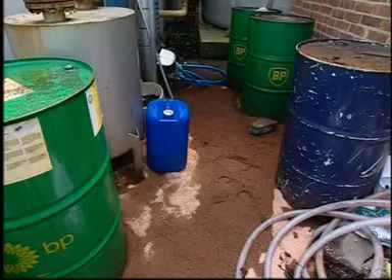Liquids, if not handled or stored correctly, can become a pollutant. Spills of oil, chemicals, solvents, or even foodstuffs can have a direct impact on the environment. Spills can be caused through accidents, leaks, poor maintenance, bad working practice, bad handling, and inappropriate storage.

If liquid spills of any kind are not handled or disposed of in the right way, they have the potential to cause severe damage to the environment and our water resources. Even a small spill has the potential to turn into a major disaster. Consider this. 1 gallon of oil can cover an area of water equivalent to the size of 2 football pitches.

1 pint of oil will pollute 100,000 gallons of drinking water, and 1 litre of solvent is enough to contaminate 100 million litres of drinking water, or the equivalent of 50 Olympic-sized swimming pools. Hard to believe, but 1 litre of milk is enough to remove the entire oxygen content of 10 tons of river water. And how about this?

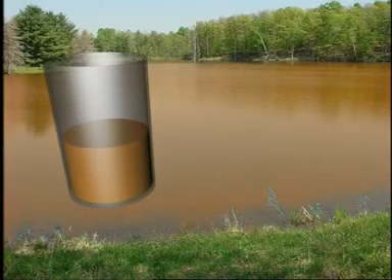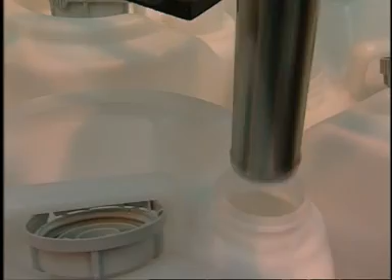Fruit juice, alcohol, yogurt, and any other organic drink or foodstuff entering water can be up to 1,000 times more destructive than raw sewage. Even in small amounts, these liquids can wipe out whole river populations through oxygen starvation. All of us who work in a process where liquids are stored and used have the extra responsibility to ensure that those liquids are controlled and do not contaminate our environment in any way.

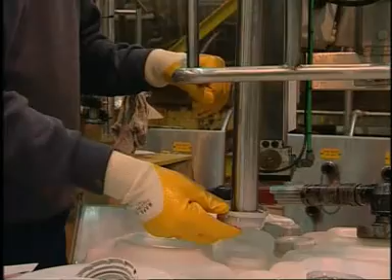The points we need to remember are that spills can cause serious harm to the environment, put employees' health and safety at risk through inhalation of fumes, contamination, slips and falls, and all these could lead to expensive clean-up costs and compensation claims, as well as loss of high-value materials and consequently profits. And if you're found to have broken the law, then you may face large fines or even imprisonment.

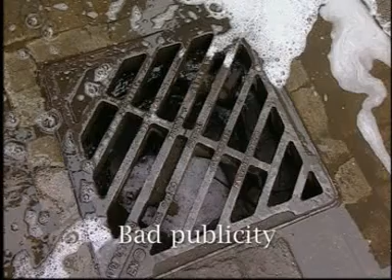Add to this bad publicity, and your reputation could receive irreparable damage, which could have a serious effect on your company. Health and safety is the most important reason for spill control. Injuries caused through spills have resulted in very expensive claims against companies. Companies who violate best practice can find that they're refused insurance or their premiums are substantially hiked.

Among the laws and regulations governing spills and their disposal are the Water Resources Act 1991, the Environmental Protection Duty of Care Regulations 1991, Protection of Groundwater Regulations 1998, Control of Pollution (Oil Storage) Regulations 2001, and the Dangerous Substances and Explosive Atmospheres Regulation 2002.

Working to ISO 14000 environmental audit standards and operating best practice principles should ensure that you improve your day-to-day operations and keep you in compliance of the law. The Environment Agency publishes a series of pollution prevention guidelines laying out best practice in a series of specific applications and a range of industries.

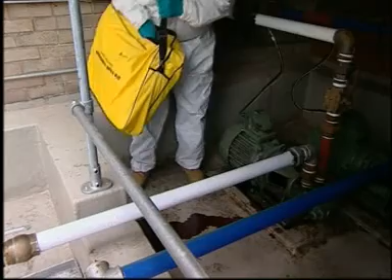In the event of a spill or leak, your risk assessment should have measures in place to deal with it in a safe and controlled manner. There's no corporate defense for pollution incidents. The people responsible are personally liable for prosecution.

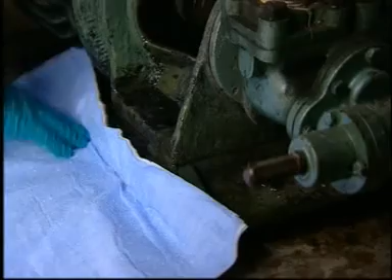To keep within the law, you need to consider several factors: site drainage, spill prevention, spill control and equipment, emergency spill response, including the reporting of incidents. Now, let's look at each of them in more detail.

There are two types of drains from most sites: surface water drainage that discharges to controlled waters or to an interceptor, and foul water drainage that leads to an effluent treatment plant on site, or more usually direct to the sewer. Each drain is coloured differently. Surface water drains should be coloured blue and foul water drains red.

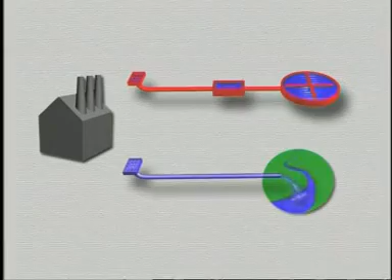Your company should have an up-to-date site drainage plan. Drains, particularly in older plants, get wrongly connected. If in doubt, ensure you get a site drain survey to ensure that your drains are functioning correctly. Surface water drains should be coloured blue.

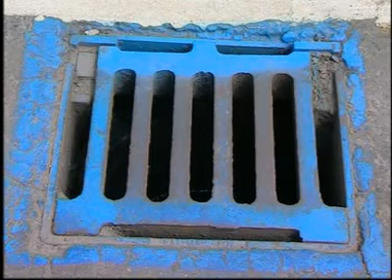Storm or rainwater is the main liquid that will flow into these drains, which flow either direct to controlled waters or, with some companies, via an interceptor to controlled waters. Interceptors are used to trap traces of oil before discharge. Interceptors should be regularly checked and emptied. Companies must have consent from the Environment Agency to discharge anything apart from clean water to controlled waters.

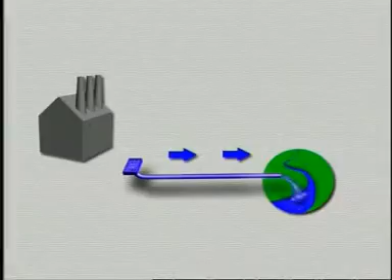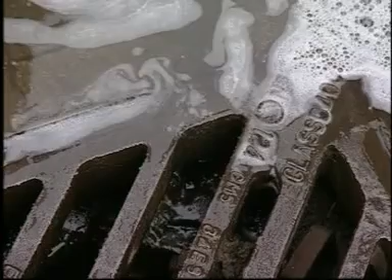When cleaning machinery or a vehicle and the drainage is into a surface water drain, you may be creating a pollution problem by using detergents or washing away oil-based liquids. You'll therefore need to move the operation to an area that has drainage for foul water or provide a suitable drain for that work area.

Drain covers should be located near to vulnerable drains and deployed where there's a risk of spillage or when a spillage happens. You may wish to consider placing barriers or defense channels between any liquid storage areas and surface water drains.

You also need to be aware that liquid spills may be able to permeate into the ground and contaminate groundwater, which could also drain into controlled waters. In this case, it's important that a suitable non-permeable surface is present where you handle or store liquids.

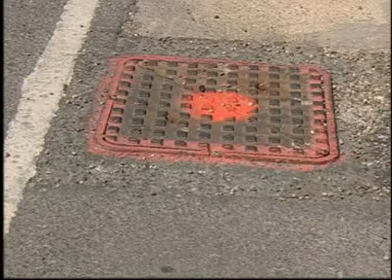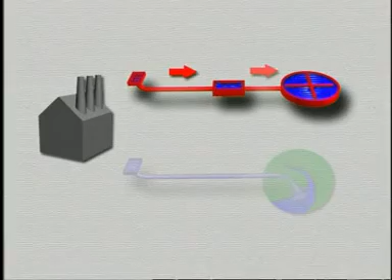Foul water drains lead to an on-site effluent treatment plant, or more usually, direct to the public sewer. The drains should be coloured red. You have a duty to ensure that your foul water drains are in good condition and kept unblocked. You need consent from your sewer undertaker to discharge foul water to the sewer.

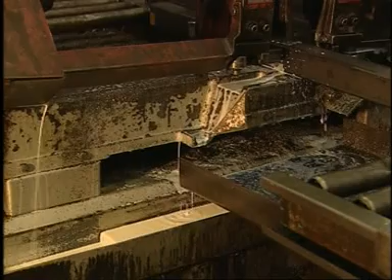The risk assessment of your operations should help you identify areas that may be vulnerable to leaks or spills. These areas can be bulk liquid storage, drum storage, smaller container storage, liquids in the production process, and liquids used for services. Reducing risk or preventing spills is a requirement of health and safety law and needs planning and careful consideration for your particular type of operation.

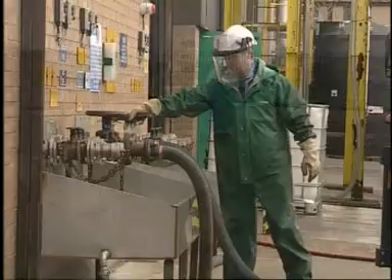Most spills or leaks come about when liquids are being transferred from one place to another. Liquid in pipes has the potential to leak at joints and valves, and liquid in drums and containers can leak through damage or bad handling.

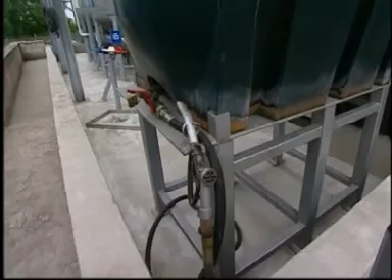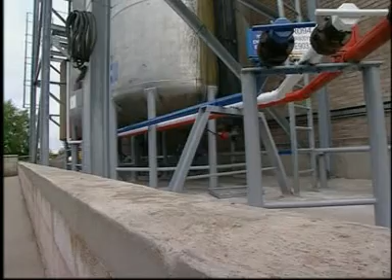Let's take a look at bulk storage and how we can prevent leaks. Bulk tanks should sit in a bund, which is effectively a secondary holding area to capture any leaks from the tank itself or spills during loading and discharge. You have to consider the condition and effectiveness of the tank and also the state of repair of the bund. The walls can become damaged and the seal or lining can deteriorate, increasing the risk of leakage.

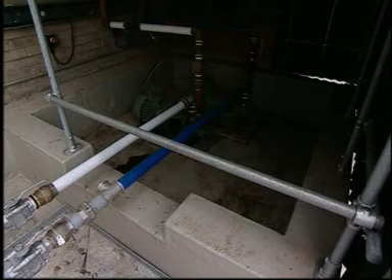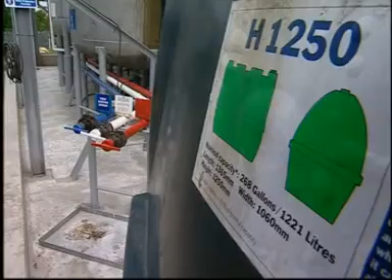All bunds should be impermeable to oil and water. Bunds need to be inspected regularly and, if necessary, repaired or relined by a specialist company. All bulk tanks must be labelled correctly with the volume of the tank and the contents within. And if they have any pipes or valves outside of the bund, then the seal should be checked regularly for leaks and a drip tray should be placed underneath this area as a precaution.

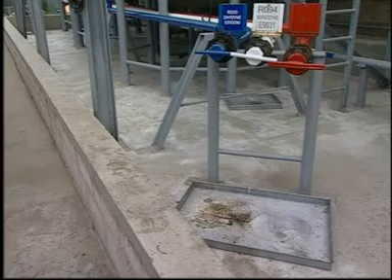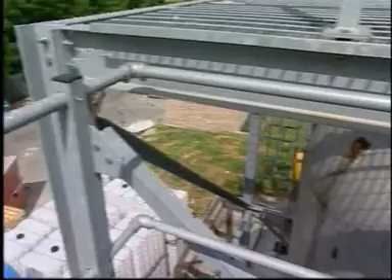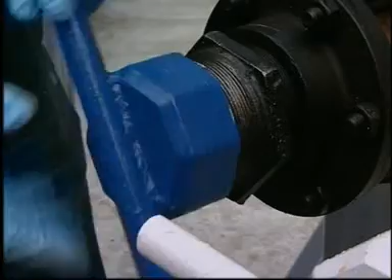Overfilling of bulk tanks and leaking taps and valves are the most frequent cause of liquid spills. Always ensure there is room in the tank before filling, and the delivery of bulk liquids is always supervised. Joints, seals, taps and gaskets should be regularly inspected. If there's a drain near a bulk delivery point, then drain covers should always be deployed before delivery commences. Valves should always be padlocked to avoid vandalism.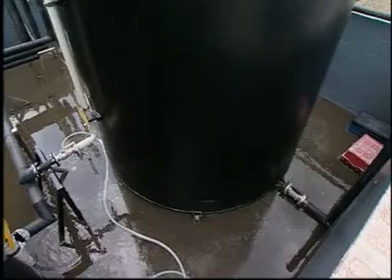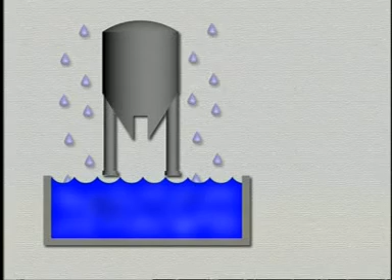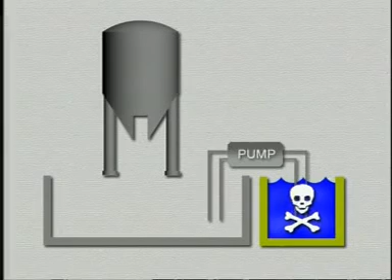External tanks are of course open to the elements, and that means that if bunds are in good condition, then rainwater will collect in the bund. This reduces the holding capacity of the bund. You should therefore have regular inspections of bunds and a system in place for the pumping out of any excessive rainwater. This rainwater may be contaminated by the liquid held in the bulk tank and should be disposed of in the appropriate legal manner.

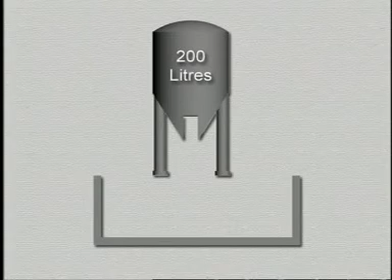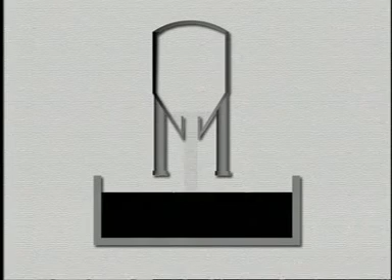External oil storage of 200 litres or greater must have a secondary containment system, a bund, and it must be able to hold 110% of the capacity of the single largest container being stored, or a minimum of 25% of the aggregate capacity for bunds storing multiple containers.

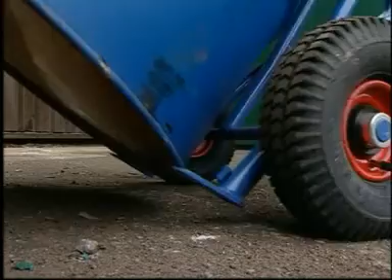Drums containing liquids can also be stored indoors, and you should consider secondary containment such as drum spill pallets. Drums and liquid containers are particularly vulnerable during handling and transfer. Moving them increases the possibility of damage, and the risk of a spill or a leak becomes greater. Drum dollies can be used to transport containers safely. Equipment is available for drum storage that provides secondary containment, and you may wish to consider these for your needs.

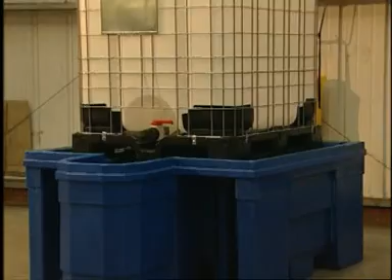Your business may not use drums, but may deal in bulk storage and handling of other liquids. In this case, you may need to store your goods on a pallet that is designed to collect any leakage from damaged goods. Intermediate bulk containers, or IBCs, also require secondary containment. Wherever you store liquids, best practice should be that you have a secondary container to capture any leaks, however they might occur.

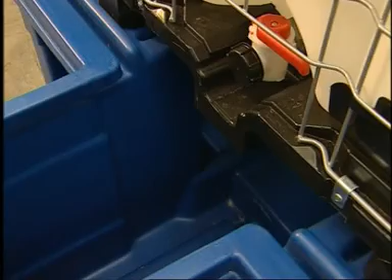We've looked at storage outside and inside buildings using bunds, special pallets and safe handling equipment. But what about when you're storing hazardous material outside? These need to be stored in a separate safe area, and this itself should have inbuilt precautions to prevent spills or leaks escaping into the environment. There are safe units available to cover the storage of most hazardous liquids. Wherever liquids are stored, best practice requires availability of drain covers if close to surface water drains. It also requires spill kits to be in place of the right type and absorbent capacity.

Your risk assessment is your guideline for implementing controls in the eventuality of any spills or leak in the workplace. The controls will, depending on the liquids you use and are assessing, invariably recommend measures, procedures and equipment best suited to tackling the leak or the spill.

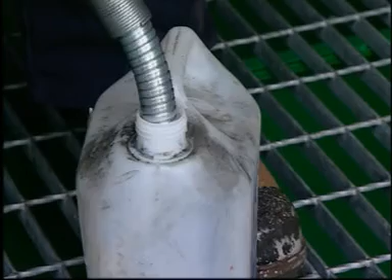In most plants, there's day-to-day cleanup, including housekeeping, and provision for an emergency spill. In a process like this, oils are regularly dispensed from drums as part of the work task, and provision is made to control these types of spills. Older machines can leak, and in many factories and works there are regular spills and leaks that may be partly due to the work process. Easy and on-the-spot provision of effective absorbents allows for efficient operations. Regular cleaning should not be confused with provision for an emergency.

Emergency spill kits of the right type and capacity should be deployed, but only used in an emergency. They should be regularly checked against pilferage. There are many products on the market to help you prevent and control spills and leaks. Absorbent socks and pads are immediate, fast, easy to use and cost-effective.

It's best practice to place absorbent materials or wipes anywhere in the workplace where liquids are used and spills could happen. If you use materials and equipment that become contaminated themselves, remember that they have to be disposed of in a correct and safe manner. You may need special tools and/or personal protective equipment to clean up liquid spills, and these too will need to be cleaned and disposed of in a correct manner. Remember, prevention is probably the best form of control.

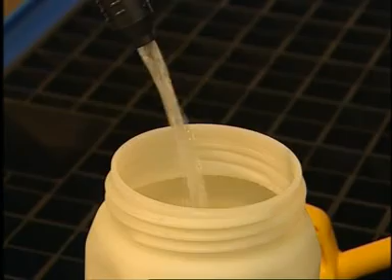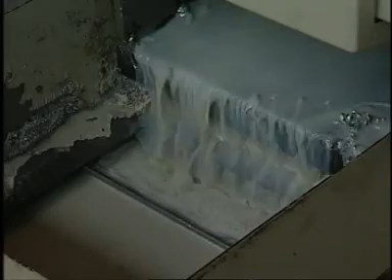Storage and the handling of liquids inside buildings can be approached in much the same way as external storage. You have to consider that it's likely most of your manufacturing processes will take place inside. You'll need to look at these in isolation and decide what is the best way to control any leaks or spills and what measures to put in place in the event of an accident. It may be that a spill kit strategically placed will serve most of the needs for one particular work area. It may mean that you'll need to place absorbents in a suitable place to eliminate risk.

Spill kits are available for 3 specific applications. For maintenance absorbency required inside factories and other premises where oil, water-based cutting fluids and mild chemicals may be used. Then there's outside spills, such as oil and water. This spill kit allows you to absorb the oil and not the water. Chemicals, strong acids and alkalis require absorbents that are designed specifically for them. British standards require that these absorbents are coloured yellow.

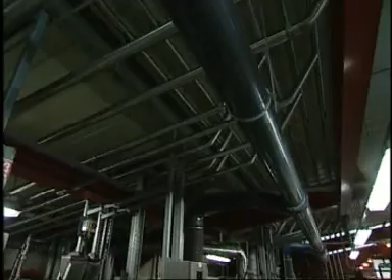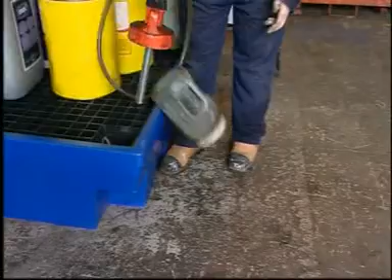The added problems inside a building can come from things like pipes and ancillary equipment. They need to be included in your risk assessment and controls put in place. Whatever the storage or operation, wherever you work, being observant, vigilant and active towards any problems with spills and leaks is important. Good housekeeping may be just the reaction that's needed, and it's something we should all feel responsible for. Don't ignore what you might consider to be a small problem. It may soon become a bigger one than you think.

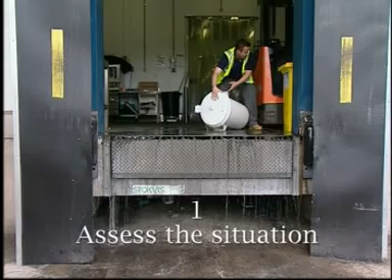Best practice requires you to have an emergency spill plan, detailing contact numbers including those of trained first responders. All first responders should have had training involving both classroom and practical training. You also need a guide of how to deal with the liquid being used. In the event of an accidental spill or leak that has the potential to cause harm either to people or the environment, there are clear steps you should take. Assess the situation. Try to assess what the liquid is, the quantity involved, and if anybody's injured.

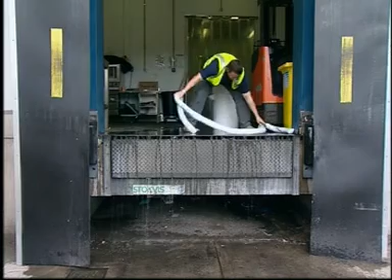Protect yourself and others by wearing personal protective equipment if necessary in accordance with the material safety data associated with the spilled liquid. Contain the spill. This will buy you time and help you reduce the area of contamination and lessen the impact. Stop the spill. Once the spill has been contained, you can stop the source of the spill. Reassess the situation and make sure the spill is fully under control.

Clean up. Using appropriate materials, treat all contaminated material as the liquid spilled. The absorbent takes on the liquid's characteristics and may be needed to be disposed of as special waste. Decontaminate. Ensure all personnel, personal protective clothing and equipment is decontaminated and/or disposed of correctly. Report. Learn from your experience, inform and report to everybody involved in the spill and change procedures if necessary.

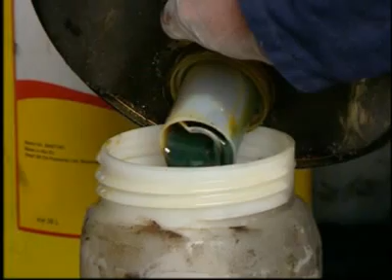Make an after-spill analysis. This is vital in helping you identify the cause of the spill and prevent it from happening again. These steps are a guide only, and it may be that your operation may require additional considerations. Again, these should be accounted for in your risk assessment and any spill analysis you may have to make.

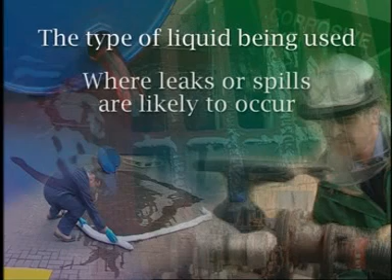Spills or leaks can happen at any time and without our prior knowledge or consent. There's no doubt that when you consider the way in which you use or handle liquids, that prevention is better than cure. Your risk assessment should identify the type of liquid being used, whether it's hazardous or has the potential to cause harm, where leaks or spills are likely to occur, what equipment is needed for the control of any spills or leaks, and have in place an emergency action plan.

Being vigilant about all your working practices is very important. Being vigilant about health and safety is essential. Spills and leaks can cause harm that you may have never considered. Preventing a simple slip or helping avoid a major disaster is an obligation we all have in our workplace. Reducing or eliminating spills and leaks will make your working environment a better place to be. It will increase the well-being of your staff and productivity. When it comes to spills and leaks, do something about it, and the natural environment will be a better place to live.